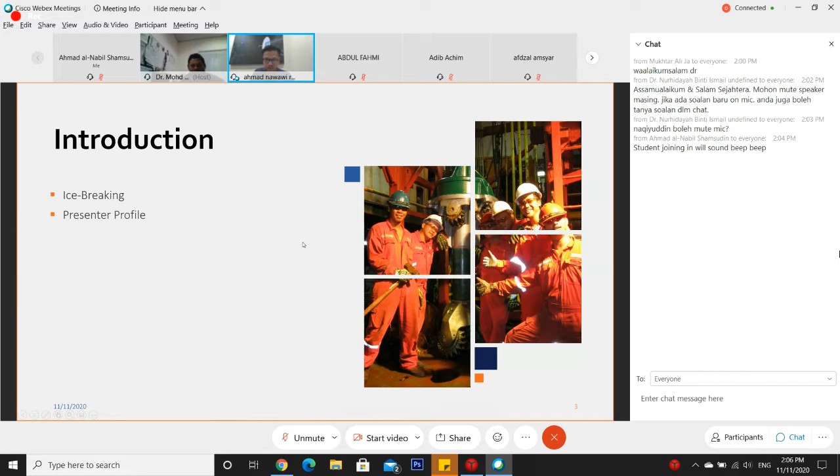Okay, actually, if possible, I would like to hear from any one of you. Is anybody from UTM know what is HSE in general? If anybody can answer, maybe if you don't want to talk, you can write in the chat. So I have some overview on your basic understanding at least. Ng Kai Jun, Health and Safety Executive. Green Hat, okay. What else? What else you know about HSE?

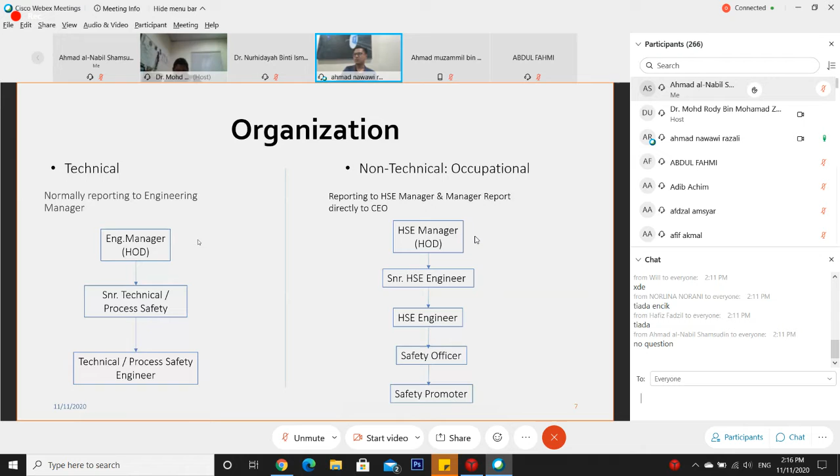Maintain technical and operational requirement for safety critical element, performance standard and safety case. Just now saya ada tunjuk performance standard yang kita refer API, ASME. So you all ada, I believe ada one of your subject is to understand what is standard. For this task, kita akan buat analisis and refer kepada standard-standard tersebut untuk identify critical element sesuatu design.

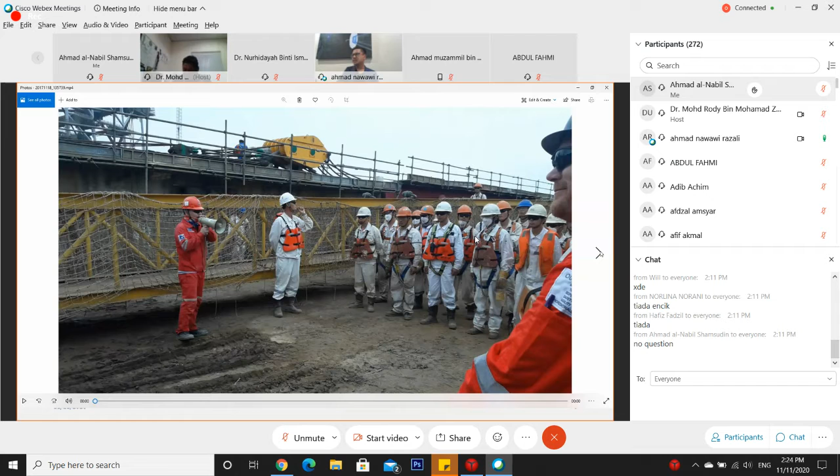We will have a plan. So what we need to do is to make sure they implement all the plan that we have set up. Okay, this is the same. Okay, this is our team. Just now is our subcontractor, and this is my team. Still, I'm advising. This is my engineer, field engineer. So my function is to advise them and to monitor that they are following all the plan that we have set up.

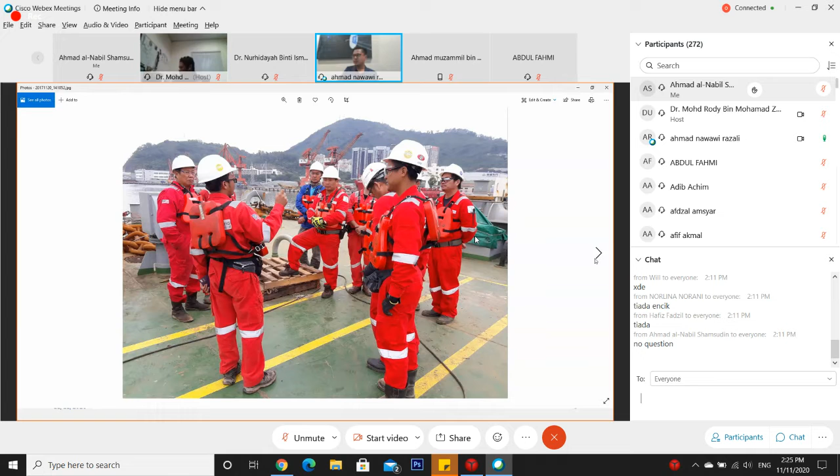Okay, this is the work that we carry out. Okay, sorry. So this picture is a good example. Let's say when we talk about technical safety, what technical safety does is, for example, for this helicopter to land on this helipad, during the design stage, they will analyze in terms of safety if this structure is safe for this helicopter to land, what requirement, the firefighting system, what firefighting system they refer to.

Meanwhile, for the occupational safety, for all the firefighting system, they will identify whether they have been tested, can be used, whether the maintenance has been done before this helicopter can land on the helideck. Okay, what else? Let's see. So occupational safety, we check whether they did the preventive maintenance to this firefighting system. Okay.

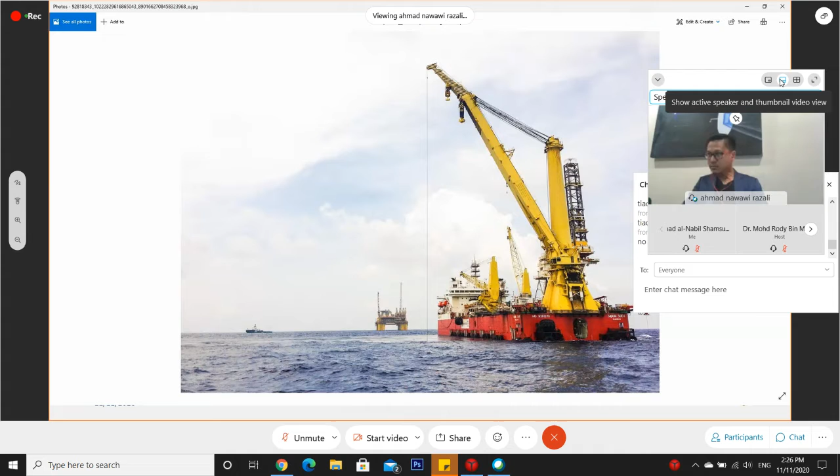And one of the tasks is to give training. This one is in Qatar, Doha, for the jacket installation project. This is an example of what we did offshore. I think this one is a diving operation, very small. It should be a video. This is a recent drilling campaign I did last year. So

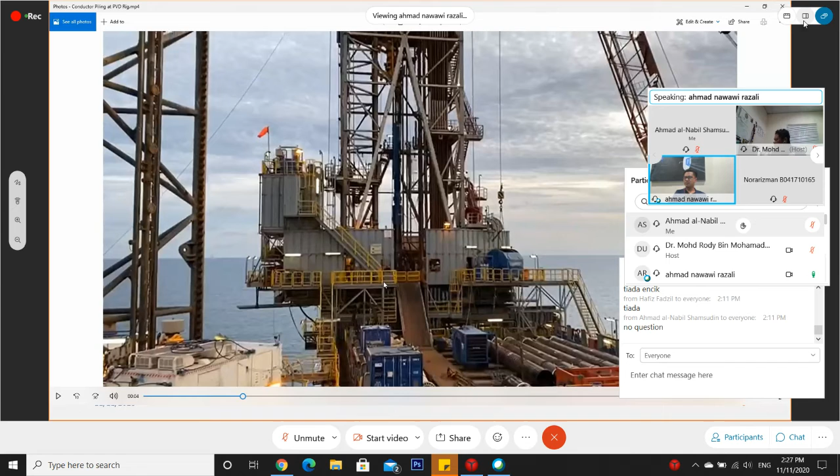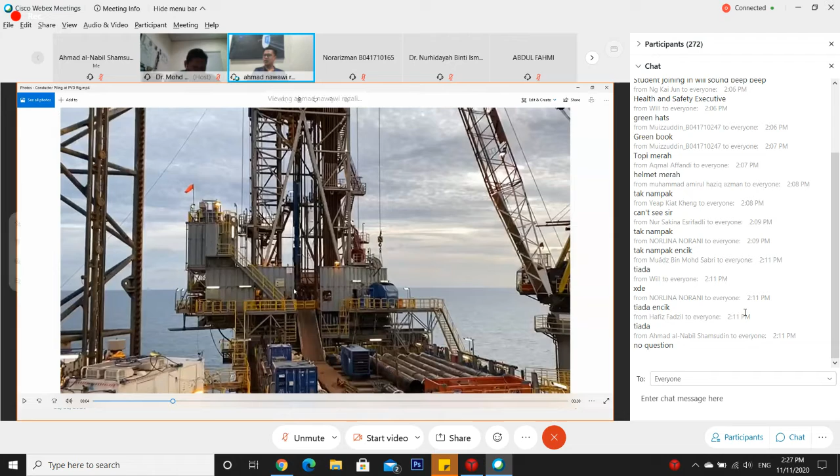for the technical safety, they will analyze what will happen if the well blows out. How much radius will the fire splash to the people? We have the accommodation here at the back. So when the fire splashes, how much will the radius of this fire affect the people living in the living quarters? What will happen to the people during drilling? And then how many minutes they need to evacuate from this drill floor to the accommodation.

Meanwhile, for the occupational safety, we will look into the operation of this drilling activity. Have all the lifting equipment been maintained? Do they have valid certificates? Is the rigging equipment color coded? Do your personnel have proper training, are they competent, are they fit to work? Are they healthy to work? So this is the difference between occupational and technical safety.

Okay, this one during, okay. Besides that, normally HSE will also need to look into environmental. This is a training I did in Doha for environmental megafauna control, because in Doha we have quite big numbers of whale sharks. This is during the drilling activities. I'm inside the drilling console.

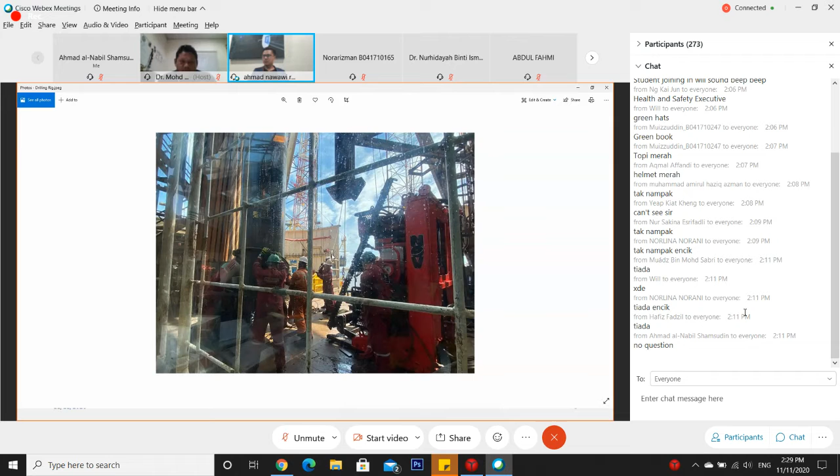So, like I said just now, one of the occupational HSE functions is to monitor the activity. We have trained them. We have set the requirement. During the execution, we monitor. Actually, for the monitoring, we have a safety officer, as in the organization chart I shared earlier. For technical safety, you don't normally go to site work.

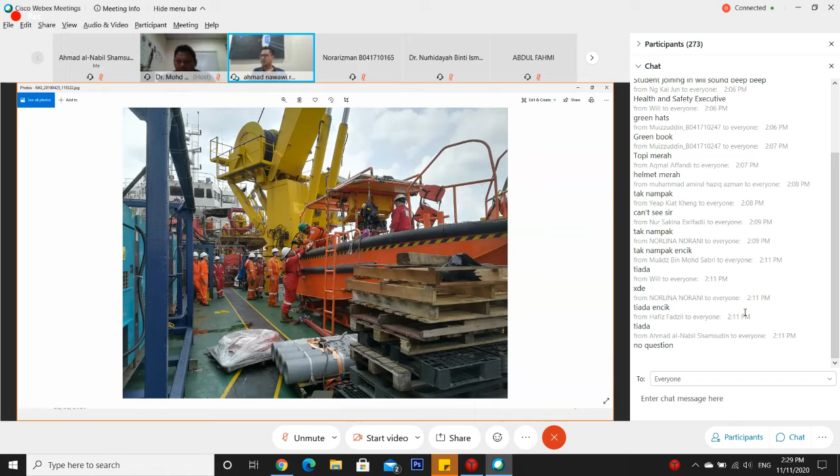Okay, this is my work in Thailand. We're doing diving work using this small boat. Yep. And this one I can't remember where this is. Okay, so that is it. That is some overview of my work, and now I would like to share the real work and the difference between technical and occupational.

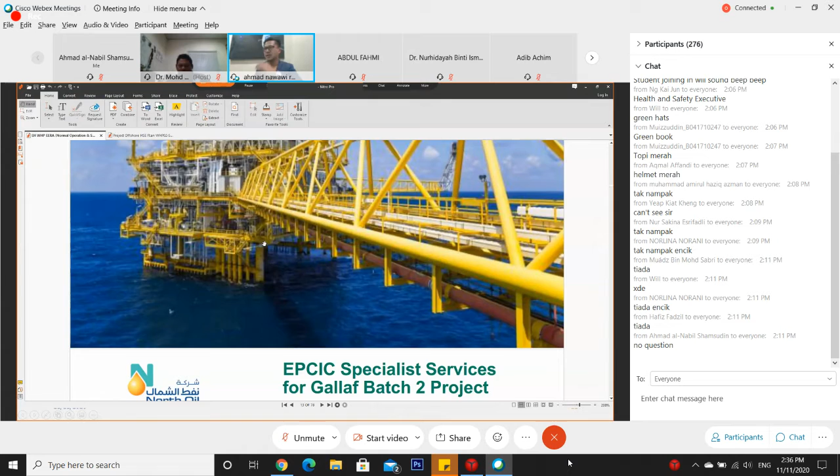Okay, next I want to share the actual work. This is my current project - we are doing the jacket and topside, or in simple words, doing a platform extension.

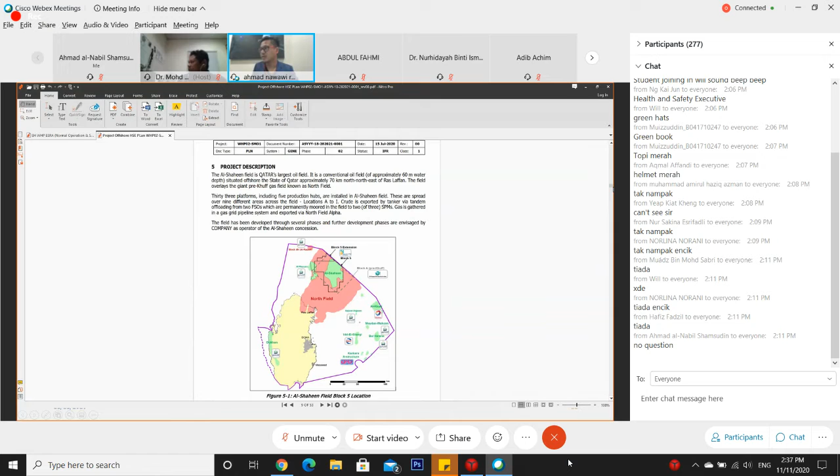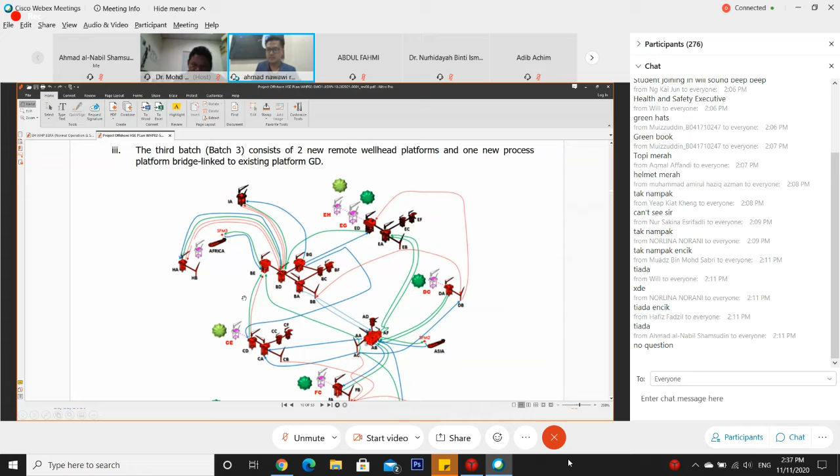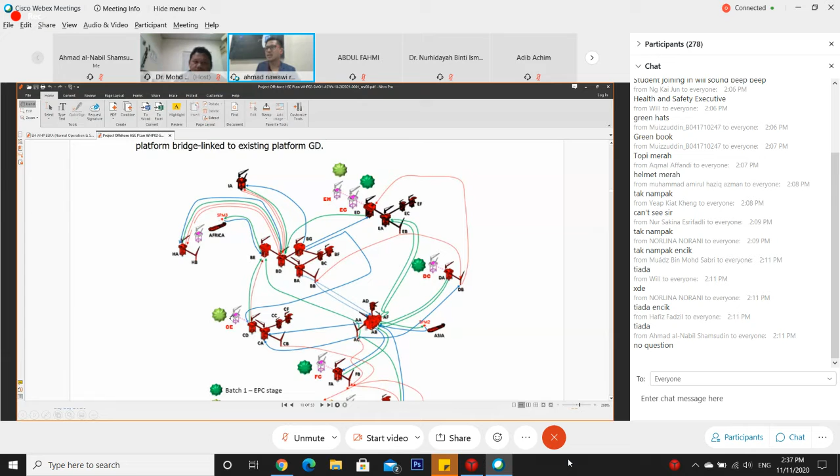Let me show you an overview so you have an idea what we are doing. This is the platform currently available at one of the fields in Doha. We want to fabricate two more platforms, CE and EH, so we are going to fabricate this platform. Actually, we just started fabricating it at Batam. Then we will transport it to Doha and install it. So my work is basically to look at overall occupational safety for these activities, covering transport of this platform from Batam to Doha, then bringing it to the location for install and commissioning.

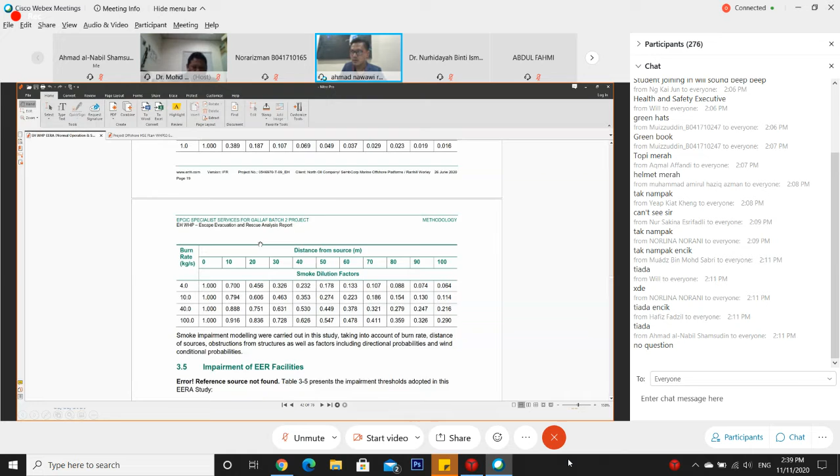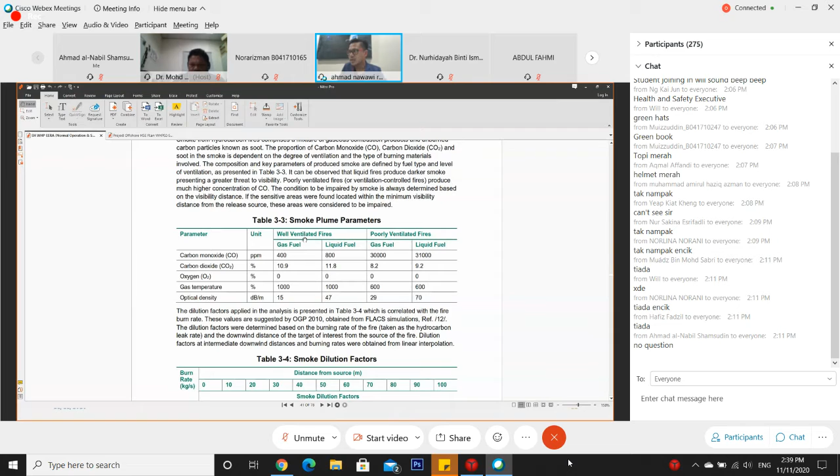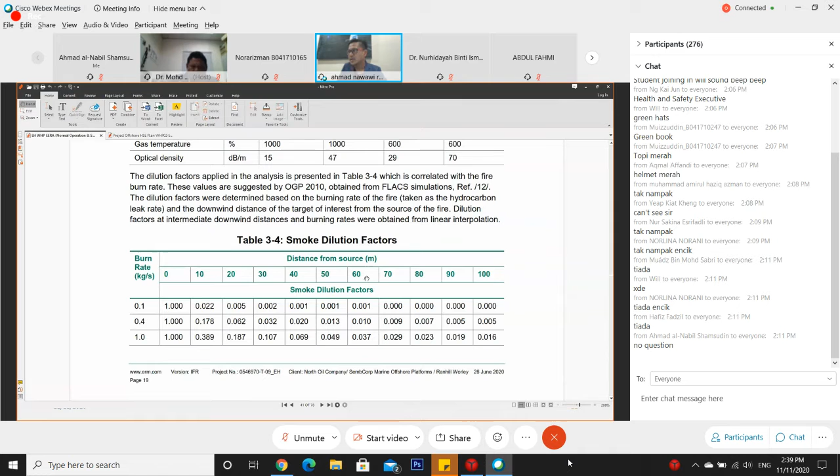What they did is they do an analysis - this report's title is Escape, Evacuation and Rescue Analysis. So they are analyzing how people evacuate if there's a fire or major accident on the platform. For example, they do an assessment for smoke, doing detailed calculations from the wellhead - what if a poorly ventilated fire happens. This is very technical - they calculate and get the time for a person to evacuate from one distance to another. For example, let's say you are 10 meters from the source, this is the burn rate.

Very interesting for those who like to do calculations - impairment threshold for EER facilities, escape, evacuation and rescue facilities. Look at this, impairment of escape route, smoke detection and evacuation facilities. It is noted that the thermal radiation consequences pertaining to failure cases can be found in the fire risk assessment.

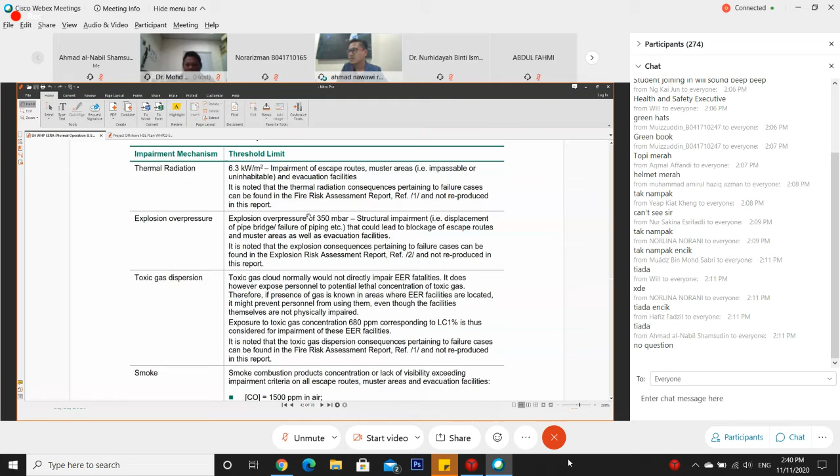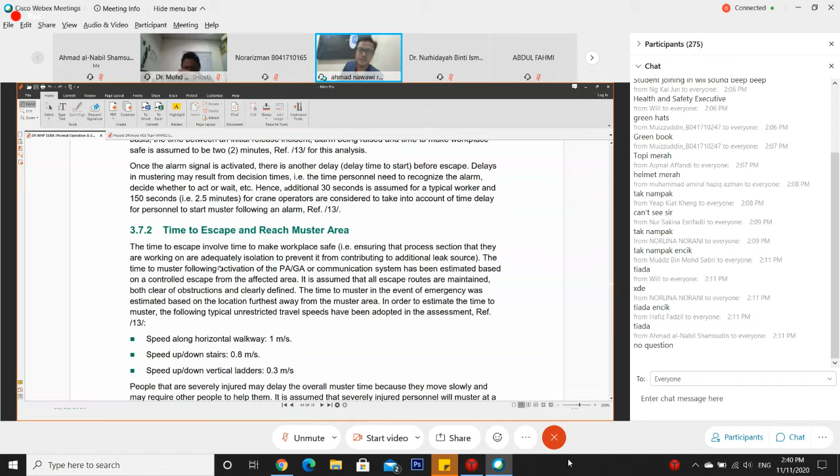Dia kira berapa lama manusia nak evacuate, sempat tak, kalau tak sempat apa nak kena buat, apa nak kena install. For example, maybe you perlukan 10 minit untuk lari ke muster station. So untuk elak fire, maybe kita install fire damper, kita install fire sprinkler berapa radius.

So very detailed. Meanwhile, in the occupational safety scope, this is one of the example procedure that you need to do. Project for this particular project, it is in offshore, so the name is Project Offshore HSE Plan. Basically, it is HSE plan.

You are doing the management work. You set up the objective for the HSE. You set up the key performance indicator. What is your target for that project or company or operation? How you manage the organization, how you do the program and recognition scheme, how you create, how you cultivate safety behavior in that particular project or particular company.

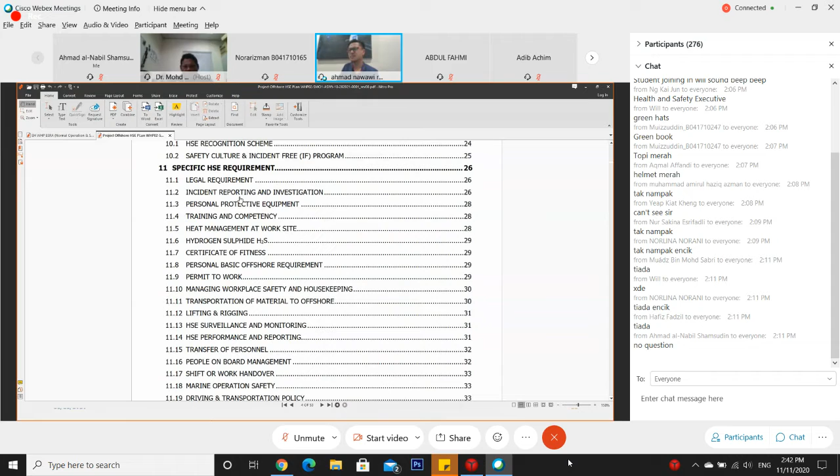Then you need to develop procedure specific to HSE requirement. You need to look at the legal requirement. Kalau dekat Malaysia lah, kalau negara lain, you kena double check dengan that particular country punya legal requirement. Set up dia punya training, buat management, HSE management at work site.

Kalau macam case saya ni, kita ada hydrogen sulfide hazard, so I kena identify how to manage this hazard. Let's say ada blowout H2S, macam mana kru-kru ni nak selamat, nak kena pakai respiratory ke tidak. Kalau kita nak evacuate naik life raft, macam mana dalam life raft tu.

Lifting punya requirement detail lah, but focusing on the operational. Technical tadi yang technical safety dah tengok.

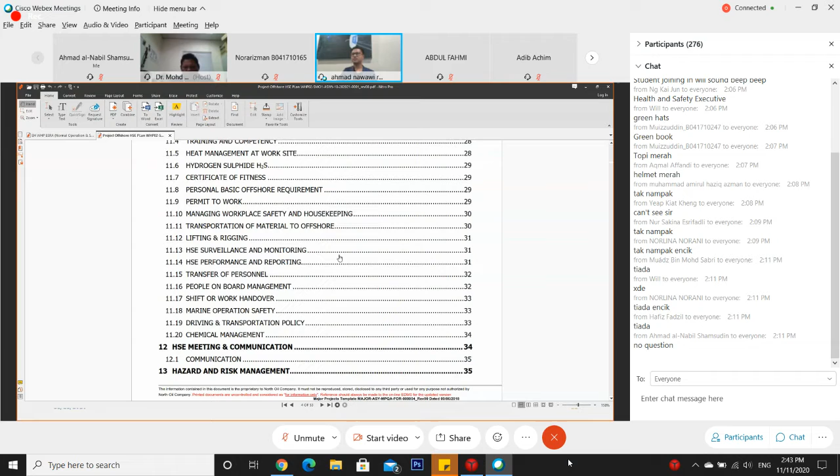Okay, hopefully semua as of now, I hope you know what is HSE. HSE very big, and then you know there is two group that you can choose. One is technical, one is occupational. This is the key, hazard and risk management. You need to perform risk assessment for that particular project, and then you have to look at the environmental, waste management, emergency preparedness, health management, and etc.

All right. Okay, next is criteria to select HSE profession.

You need to do self-audit based on your strength, based on your result. I believe all of you guys already know what is your result. You are at the 4th year. At least you can assess what is your strength.

If you are strong in engineering core subject, in calculation, in thermodynamics, in structure, in stress analysis, and then you able to adapt in process and chemical operation, and this is the most important thing, you can work in office for a long period of time, so you can choose this process safety profession.

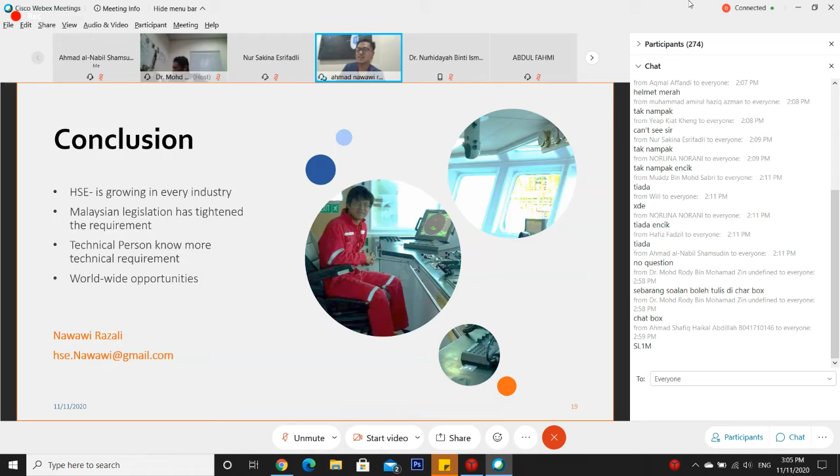Okay, you have technical background. Basically, technical people will know more on technical requirements. So this is the added value for you if you join HSE. Okay, I think that is the overview on HSE work, how you can join, what is the group, and why I would suggest for you to take HSE as another option for your life career. Thank you very much.